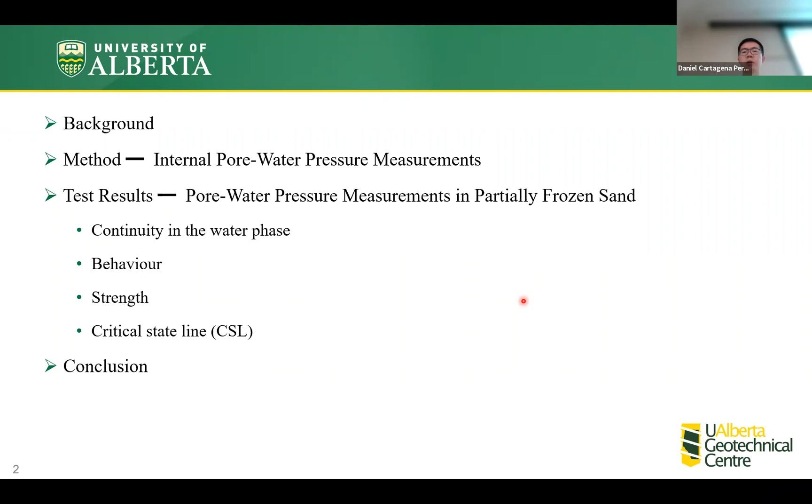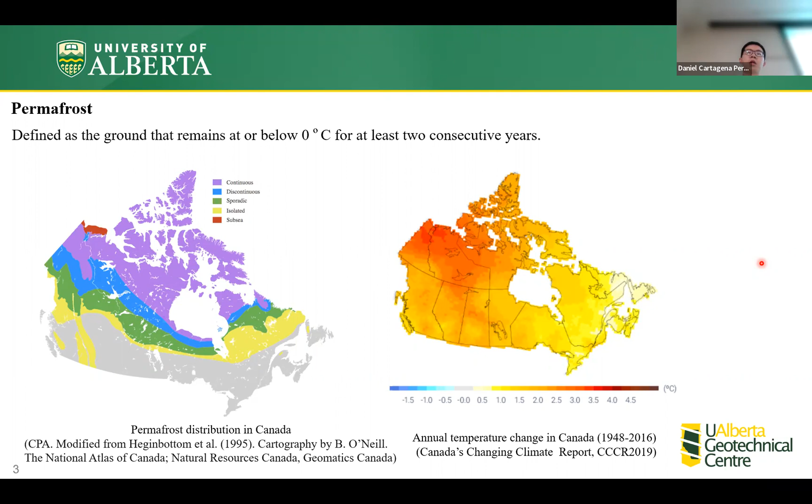As a consequence, the permafrost will start to thaw with the increase in the ground temperature. The thawing of permafrost is one of the major challenges facing northern and coastal communities, as it is associated with deterioration of infrastructure, such as the differential settlement of buildings and highways, and may also trigger instability of slopes.

The problem is the soil in these warm regions is in a partially frozen state due to the coexistence of the unfrozen water and the pore ice. In some situations, like saline or ice-rich environments, there might be sufficient unfrozen water to provide a continuous water phase within the soil.

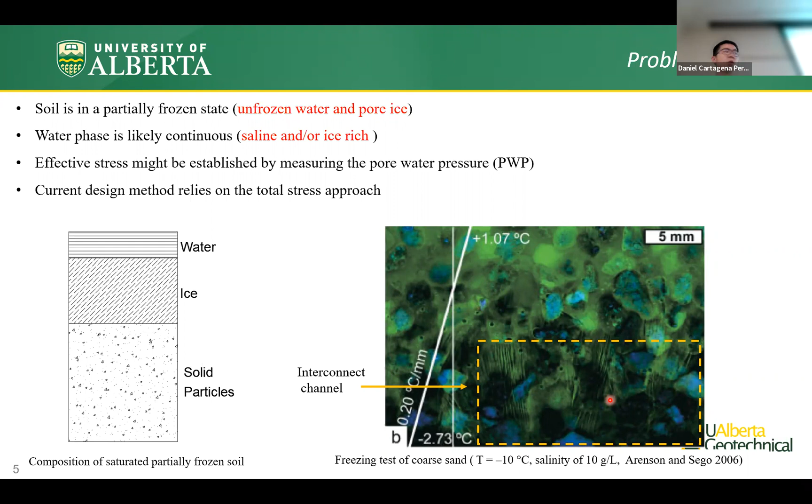Here is one example. The picture on the bottom right was taken in a freezing test on coarse sand, where the unfrozen water was turned green by using a fluorescent tracer. As you can see, the interconnected water channel can be found at close to -3 Celsius in this region. So in this case, the effective stress might be established by measuring the pore pressure. However, the current design method relies on the total stress approach in the warm permafrost region.

But there are some challenges of conducting effective stress analysis in partially frozen soil. First, how do we know if the water phase is continuous and how to examine it? In a traditional laboratory test, we only measure pore pressure at the bottom of the sample because we know for an unfrozen sample, the water phase is continuous in general. So the measured pore pressure at the bottom can be representative of the whole sample, but this might not necessarily apply in partially frozen soil because of ice.

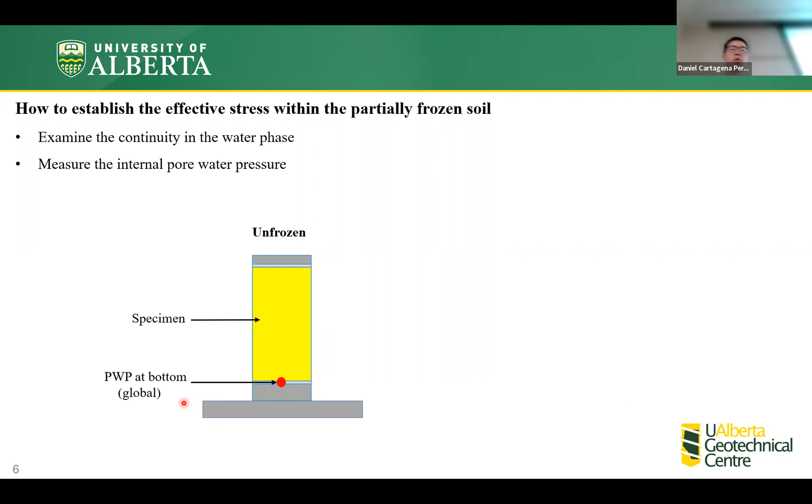If the water phase is not continuous, the pore pressure would not be independent from other phases, and your measured pore pressure will actually be the local pore pressure. You cannot use local pore pressure to establish effective stress for the entire sample.

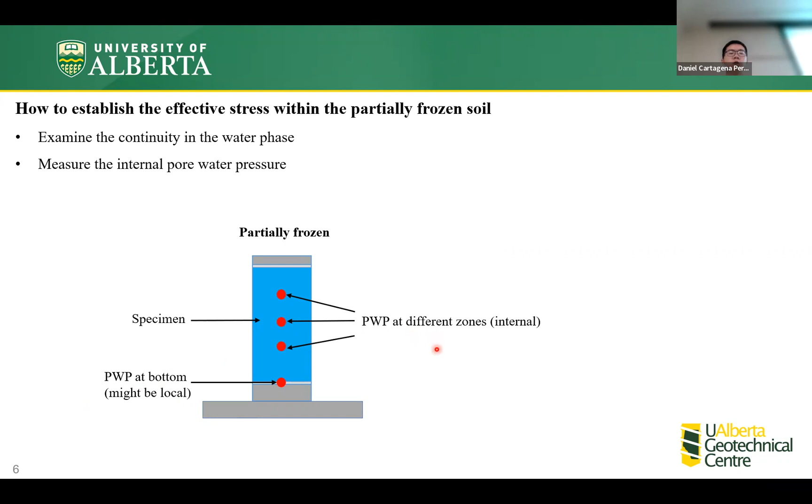But if we could measure pore pressure at different zones inside the sample, the continuity of the water phase could be examined by comparing these measurements with the bottom pore pressure. So here comes another challenge: how do we measure internal pore water pressure?

So the main focus of the study is measuring internal pore pressure and establishing effective stress in partially frozen soil. First, we developed a new method for measuring internal pore pressure. Then we measure the pore pressure response and examine the continuity of the water phase in the partially frozen soil. Next, we determine the effective strength parameters and investigate the individual effect of the pore matrix on overall strength. Last, we establish a critical state line.

Then the sensor is connected to a small diameter flex tube filled with low compressibility piezometer fluid. Here we use heavy mineral oil. After injecting, the oil droplet formed at the tube tip can transfer the pressure through the intimate contact between the oil and the pore water in the soil. Here we have three tubes embedded in different locations in the sample, at 8, 10, and 12 centimeters. We also have a base transducer for comparison purposes.

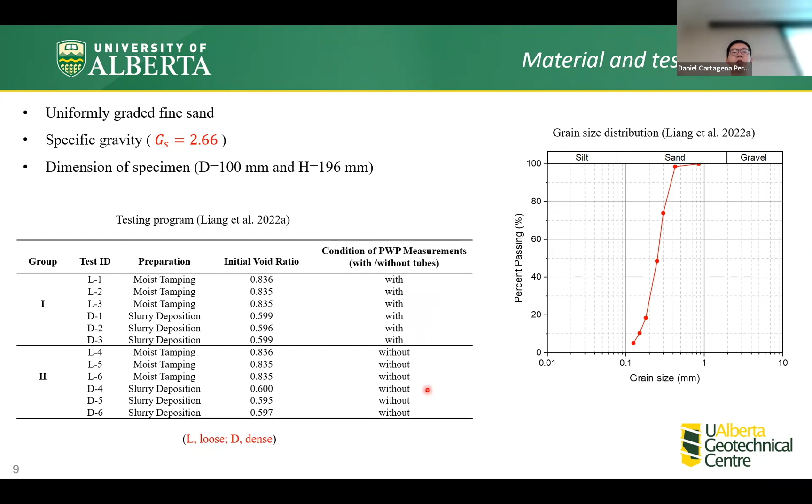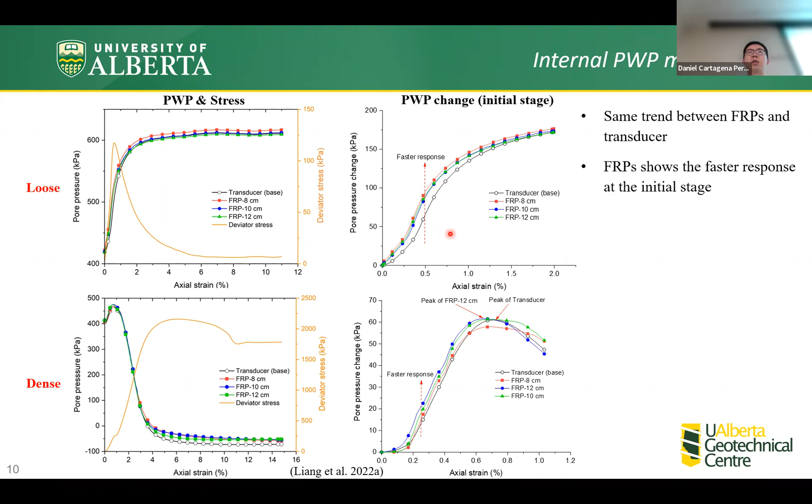We know the sand has high permeability, and the water pressure adjusts relatively fast, so we expect to see consistent measurements between the FRP and the transducer. So these results confirm the effectiveness of this method. If we look at the pore pressure change at the initial stage, it can be found that FRP shows a faster response than the base transducer because of the high sensitivity of the fiber optic sensor.

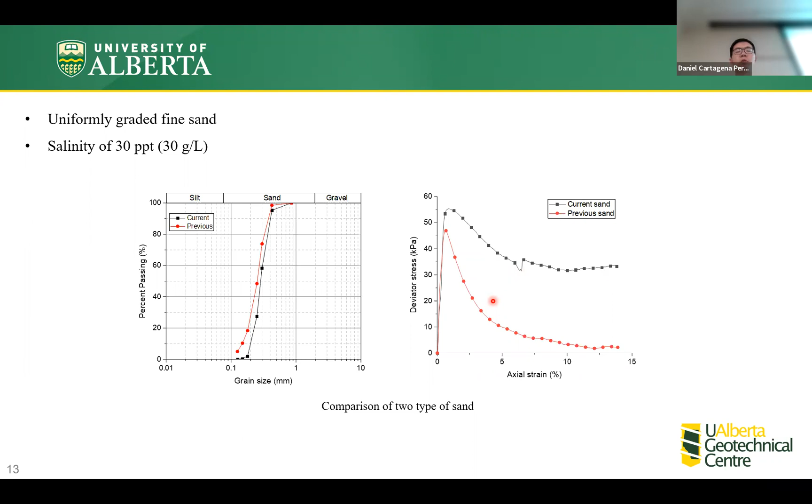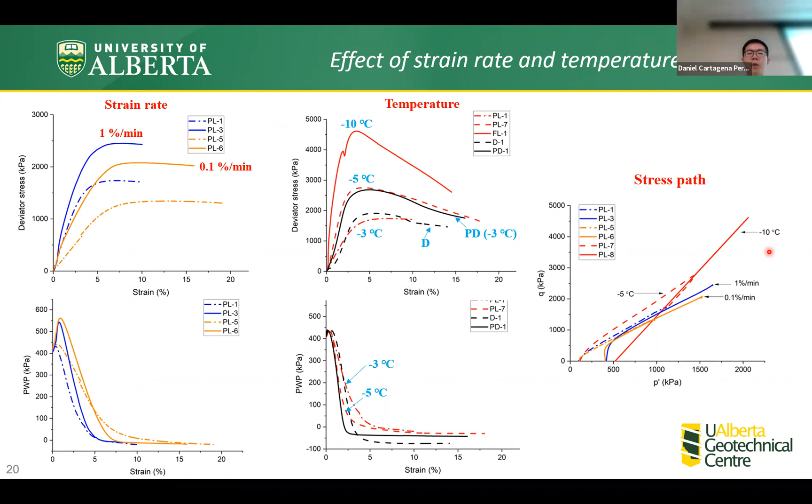On the other hand, the stress path becomes steeper at a cold temperature. For example, -10, which is considered as frozen, so the stress path here represents the total stress path. In addition, the samples fail at different modes at different temperatures. The failure mode changes from a slight barreling at -3 Celsius to a shear plane at -5 Celsius to a strong barreling at -10.

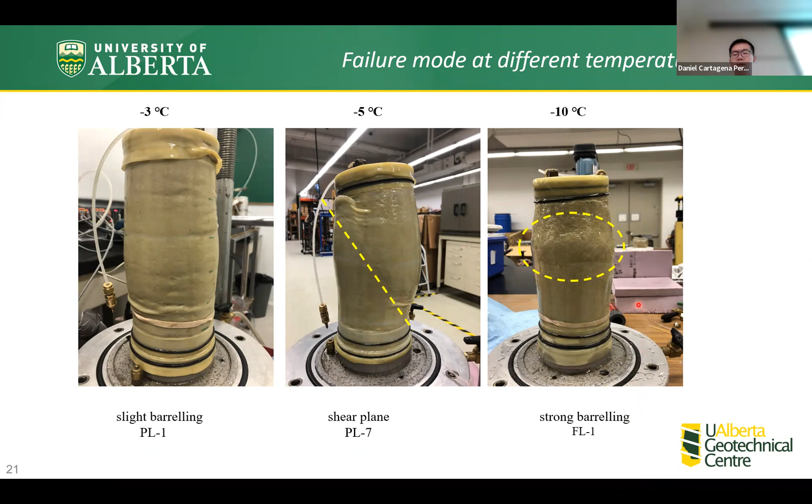Okay. Next, I will talk about the internal stress, pore ice and pore pressure, and what role they play in the strength of partially frozen sand. According to Ladanyi and Morel's postulate, the soil skeleton carries the same amount of stress in frozen and unfrozen states when the soil has undergone the same strain history. The stress tensor of the ice is equal to the difference in the effective stress tensor of the unfrozen and the frozen soil. Assume this also applies in the partially frozen sand. The deviator stress, mean stress, and the minor principal stress of the ice can be estimated.

In PL sand, the deviator stress and the stress path show almost the same response as the entire sample. So this implies the behavior of the PL sample was mainly controlled by the ice. The sigma 3 of the ice increased until close to the cell pressure, suggesting the cell pressure was gradually taken by the ice. This also indicates the ice is under a combination of compression and shear stress in loose sand.

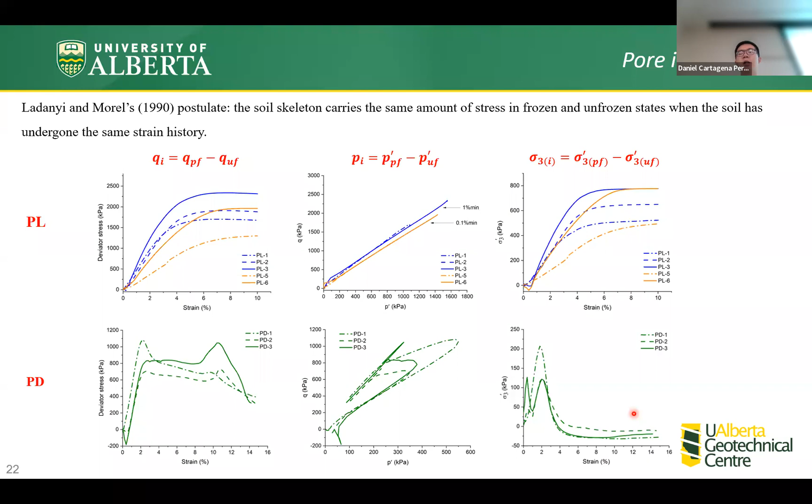In the PD sample, the deviator stress of ice is characterized by a linear region followed by relatively constant and strain softening regions. The stress path of ice of our sample shows similar trends. For sigma 3 of the ice, it first increases up to 2% strain, then decreases to a negative value. This means in the dense sample, the ice is under tensile and shear stress.

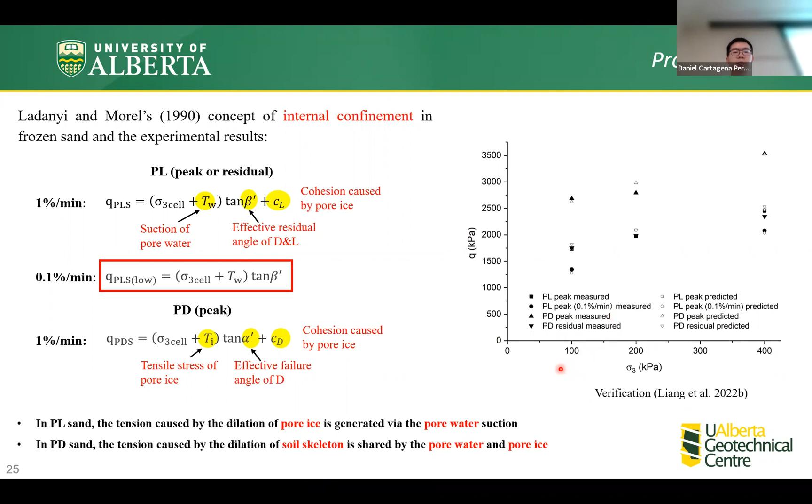In this figure, the solid and open symbols represent the measured and the predicted strengths respectively. As you can see, the proposed model can well reflect the measured strengths. Now we have measured pore pressure and estimated ice pressure. We are able to plot the stress distribution in a sample to understand the mechanisms involved in the strength of

partially frozen sand. Here, the curve of soil skeleton is taken from the unfrozen sample and refers to the strength of the soil skeleton only. The ice plus soil skeleton represents the measured stress from the partially frozen sand. The pore ice stress represents the overall effect caused by the ice, including the ice stress and the structural hindrance, which allows the cell pressure acting on the ice to be transferred to the soil skeleton.

So in the PL sample, we have pore ice stress, soil stress, the dilatancy of the pore ice, and the structural hindrance. In the PD sample, we have a similar mechanism, but the only difference is that the dilatancy is caused by the soil skeleton.

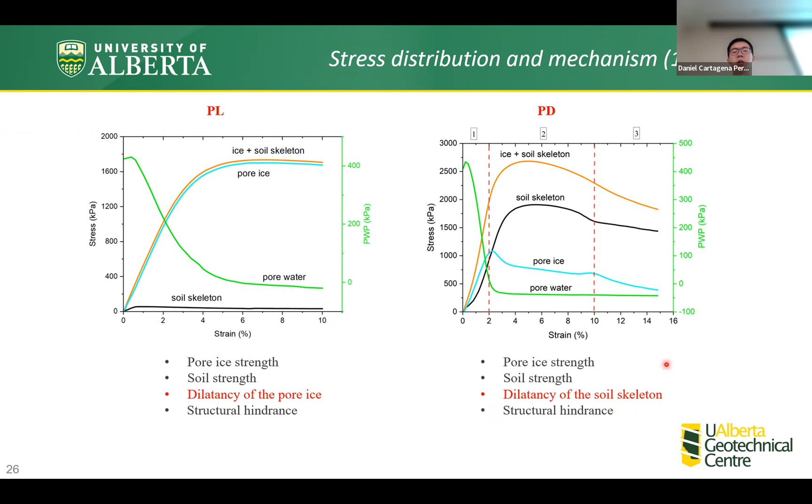The last part is about the critical state line. First, look at unfrozen sand. Since the effective stress paths are moving towards the critical state, both dense and loose sand share the same ultimate line. The conditions at the end of the tests are used to plot the CSL in q-p space. Here, a unique CSL is established in q-p space.

The CSL in e-p space was determined from 3 loose samples in undrained condition and 1 sample in drained condition. The reason why we don't use the dense sample to determine the CSL in e-p space is that strain localization occurs in the dense sample. We have to use the local void ratio inside the shear band as the critical state void ratio, but it's very hard to determine in the triaxial test. So we normally use loose sand to determine the CSL.

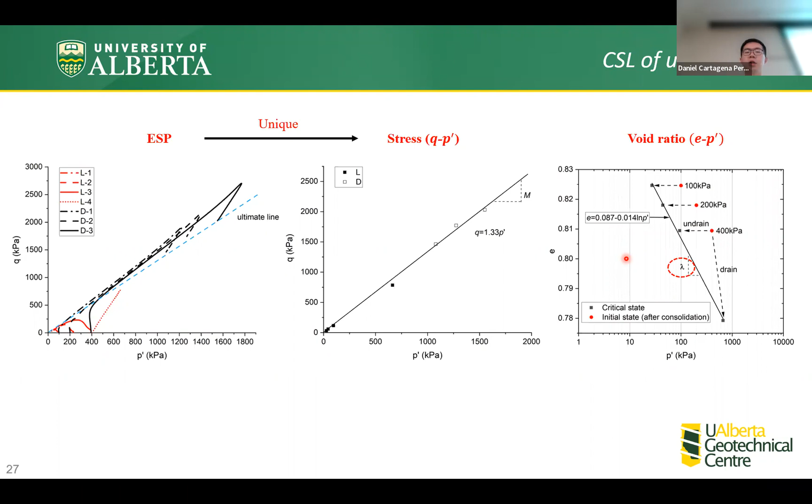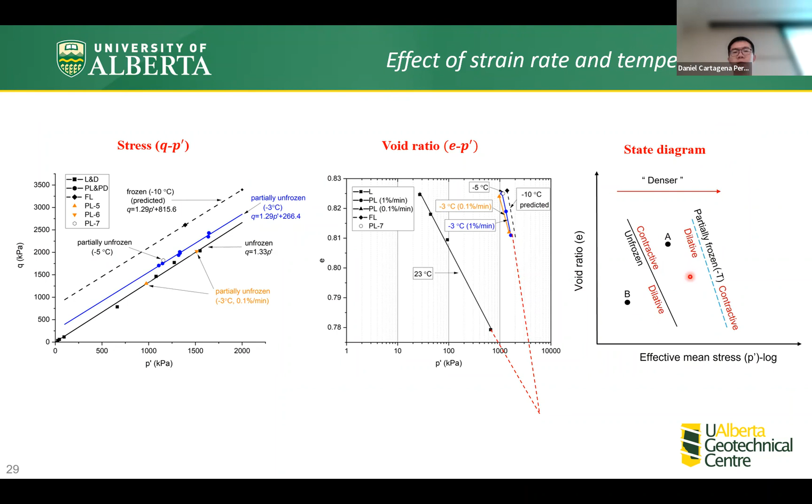Okay, just to conclude all this: the validity of the continuity in the water phase of partially frozen soil is a confirmation that effective stress analysis can be carried out in a warm permafrost region. The behavior of partially frozen loose and dense sand is mainly controlled by the pore ice and soil skeleton, respectively. The strength of partially frozen sand is a function of cohesion of the pore ice and the friction angle of

the sand grains. For loose sand, the peak stress is enhanced by internal confinement and cohesion resulting from pore water and the pore ice, respectively. For dense sand, only the pore ice affects the peak strength by incorporating the internal confinement and cohesion. Last, a unique CSL is established in the partially frozen sand at -3 °C.

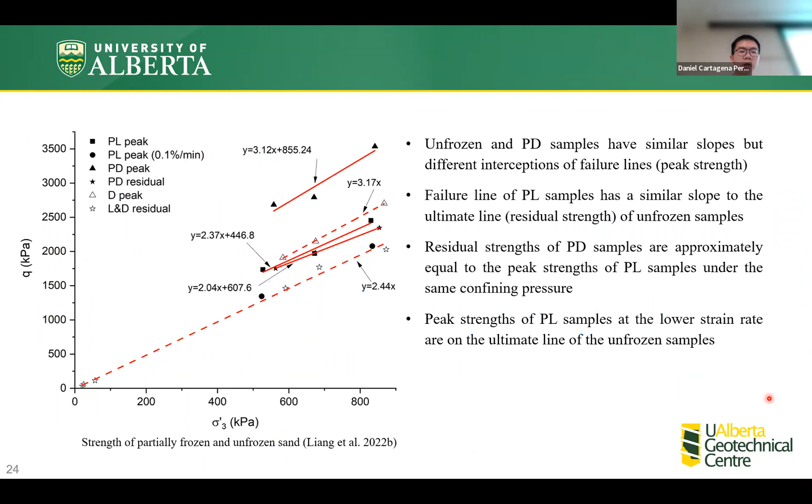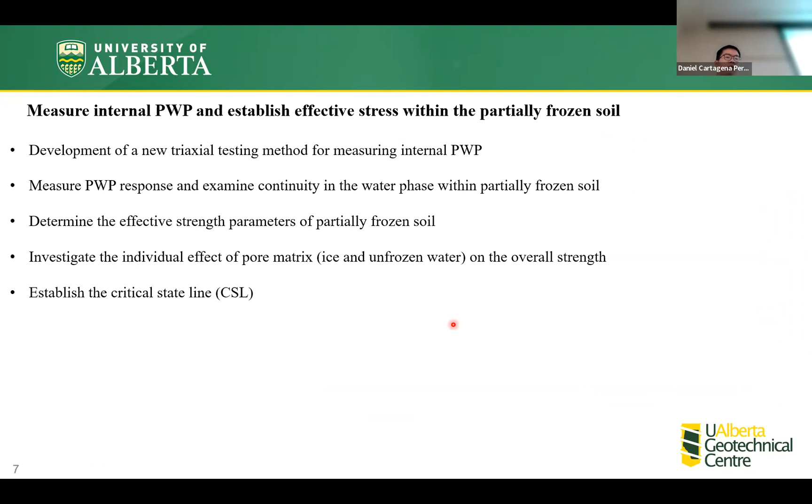Thanks. Nice presentation. Just for the online people, on one of your slides you show that the pore pressure sensor embedded in the sample shows a similar response to the water pressure at the base of the cell. Just what I'm asking is if many of the other sensors show some clogging or issues.

Just to clarify, because I think there's a lot of rationale for having those measurements, and that's why you go to this. Then the other part, I don't know if you covered already. Especially at -10 or cold temperatures, how do you know the B value that you're measuring is not just compression of the tubes of the internal measurements? It means B value, right? Yeah, how do you know it's not just compressing the tubes because of the lateral radial confinement?